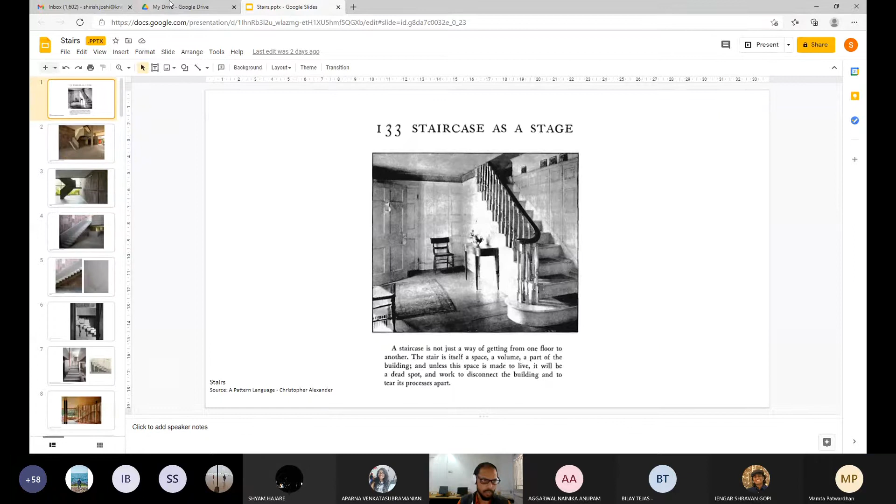Oops, sorry, just a second. I'll share this. Can you see this? Can you see the screen? Yes. Yes. Okay, great. Let me go to a full screen view and present.

This was the presentation that we had done last time, where we had looked at the staircase, and we began with this particular staircase, built in RCC at the Mill Owners. I think many of you have been to the Mill Owners and have seen this staircase. So I have a question to ask you. Can this staircase be built in steel? If you were to build the staircase in steel, what are some of the main considerations that you will immediately bring into play? Would anybody like to reflect a little bit? The basic form of the staircase has to be the same, and the basic principles also have to be the same. Can it be done?

I'd probably take it as a folded plate if you want the exact same form. The beam that meets the column may not be necessary, because it's already being supported by its own kind of form. The folded plate adds stability, and then you have it connecting directly to the upper slab. Okay, so Shravan will take just a single plate and fold it, literally like when you are making a model. You take a piece of board and fold it, but you cut it in the middle and bend it to create the two flights also. Is that what you're saying, Shravan? Yeah, and probably add a stringer or two for stability and for the aesthetic.

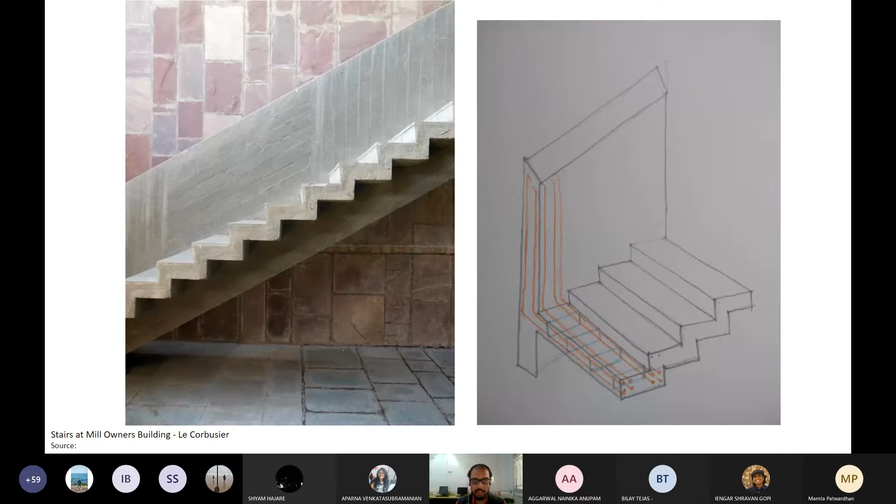Now, this is in many ways that folded plate, Shravan, that you're talking about. Yeah, the only difference is that it is made not with just a single folded plate of steel, but it is a composition of steel and cement where required, on whichever part of the staircase it is required. Each component is compensating for the other to create this kind of a staircase.

So it's possible to imagine that this staircase can also be constructed entirely out of steel. I'm going to quickly flip some of these and come to, for example, this staircase, which is also a steel staircase. If you can see, there are three stringers going at the bottom that meet the landing, and from the landing there are three stringers going up again, and an entire elaborate kind of a step is introduced.

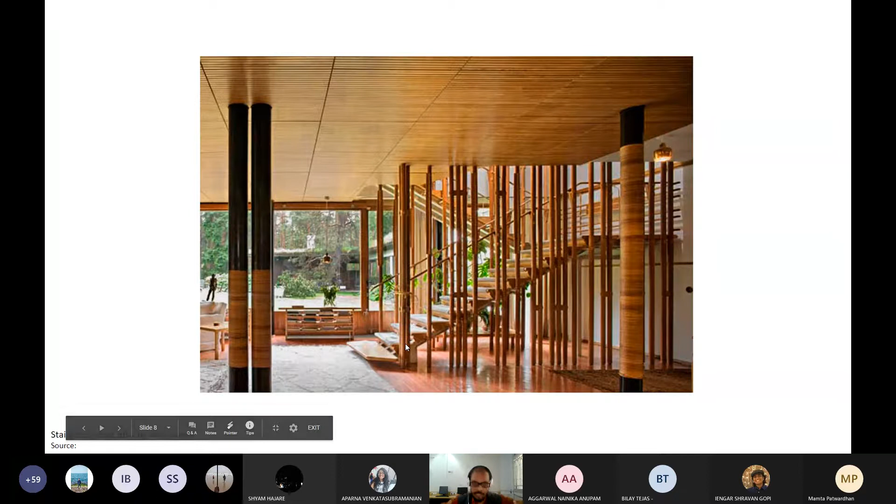I don't know if I have the detail of this somewhere. You can see over here on the side that the entire wooden base is anchored onto these three stringers, and furthermore the wooden base also supports the carpeting or the upper layer created for the staircase. You can also see that the sides and the railings are entirely made out of steel. The railing is not supported on the staircase itself, but directly on the side framework going up.

This is done for several reasons, including an aesthetic and visual sense that he wants to create. If you look at the side elements, they are not all put in the same sequence. They are actually quite random. In one case, when you climb up, on the other side they are in fact not there on the upper side at all. It doesn't need it.

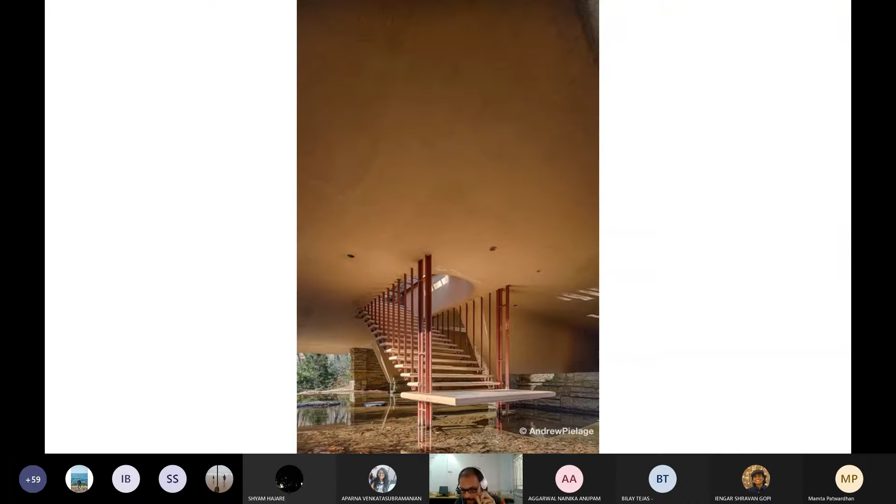Please also take a look at the material, the sizes of the steel members and the way in which it is hung. Where does the steel member become thick? Where does the steel member become thin?

Another steel staircase, in a house by Frank Lloyd Wright. The main structural member sizes are now really slender, but not as thin as a cable yet. They're steel rods suspending from the top to where the step is hanging. These rods are taking the support of both these flights up to this point. There's no need for a railing over here because the steel rods themselves behave as a protective barrier.

I'm going to quickly skip... Sorry, I just had one doubt about that staircase you just showed us. Go ahead. So when the cables are holding up the stairs, I can see that some of them are also driven into the wall, especially the ones seeing a higher force from gravity because they're above. So is the cable in this case only holding up the cantilever end while the other end is driven into the wall, or is the cable taking the entire load?

Shravan, in both these staircases, the other end is actually anchored onto the wall. So the cables are taking less weight than it looks like. The cables are taking half the load, literally. If you're spanning say 1 meter, 50 centimeters of the load on one side is taken by the cable, and the rest of it is taken by the wall.

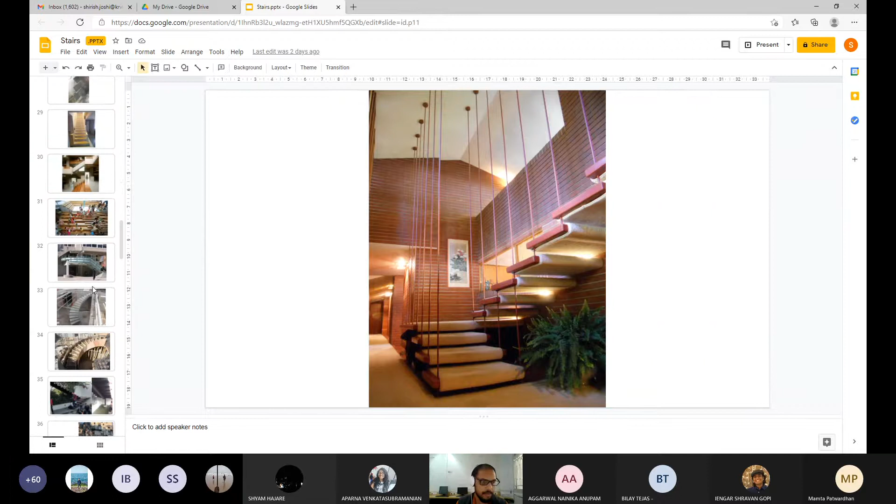Let's look at this. Here's a very interesting staircase. A part of it is built with concrete and masonry, and a part of it is extended outwards from an existing structure, and becomes a landing porch as well as a staircase. This entire staircase is actually supported directly from this particular element. You can see that the entire step is anchored onto that.

This stringer, which is on the outside over here, is also anchored onto these members, and that is how this stringer gets supported at this point to this beam. A part of the stringer gets anchored onto the platform over here. A smaller steel staircase of this scale generally does not require too much foundation. It does not require heavy foundations. There are ways in which you can anchor the staircase safely into a wall or into a base.

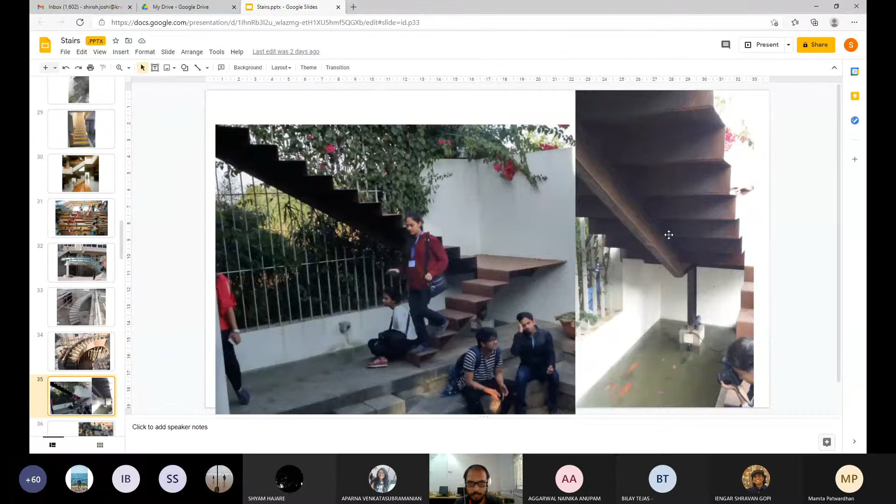If you remember, Shravan, we had seen another folded plate staircase, where earlier it was just a folded plate, but there was some motion and movement, and then the architect has added a stringer in the middle of the staircase. Same logic: a simple folded plate with a stringer attached to it, and that serves as a staircase.

Here's another advantage or potential of steel staircases: because they are very light and exert much less load onto the slabs, you can very quickly connect levels without having to compromise on your design. If the same staircase was built in RCC, I would have to create a structural system below to carry the load of that staircase. The dead load of the staircase itself would be so heavy.

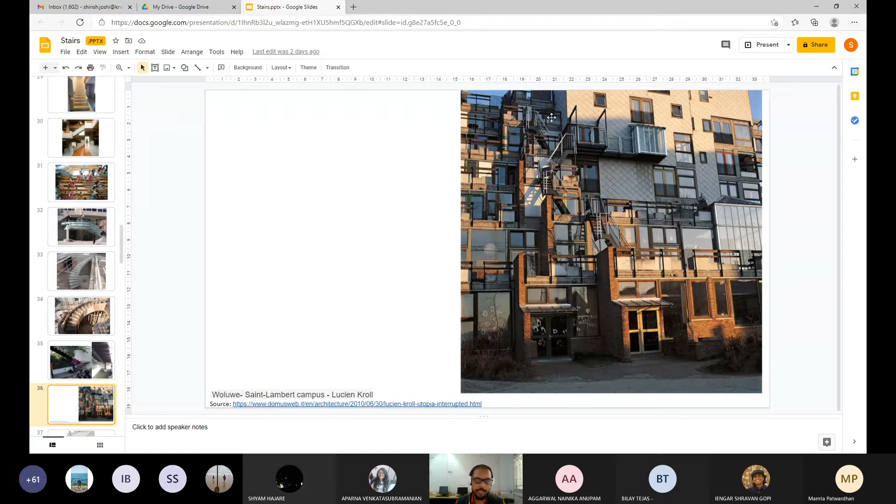In most steel staircases, that is the biggest advantage, that the dead load of the staircase is very light. So you are able to very quickly manage your movements in places that otherwise would be difficult in the logic of a masonry or concrete staircase.

I had shown this staircase as a utilitarian staircase that allows you to climb up. You can see that there is no foundation to this staircase. The slab itself is acting as a foundation. There is a disc or plate created at the bottom, which gets anchored into the slab, and the entire staircase is literally standing. It's like a heavier version of your ladder, you can say.

Although the comfort of the staircase is the same. By comfort, I mean the tread and the riser ratios are the same as would be in any other staircase. Yeah, the railing and everything is then lifted off.

The stringer beam in this case is compensated by actually breaking the single stringer into two parts and running them on the sides. So you are also hollowing out the material of the stringer, and you're using much lighter materials, but you're relying on the structural stability which is created by this element itself. So the whole thing behaves as a stringer, with this particular kind of a tread also acting as a tie in holding the stringer.

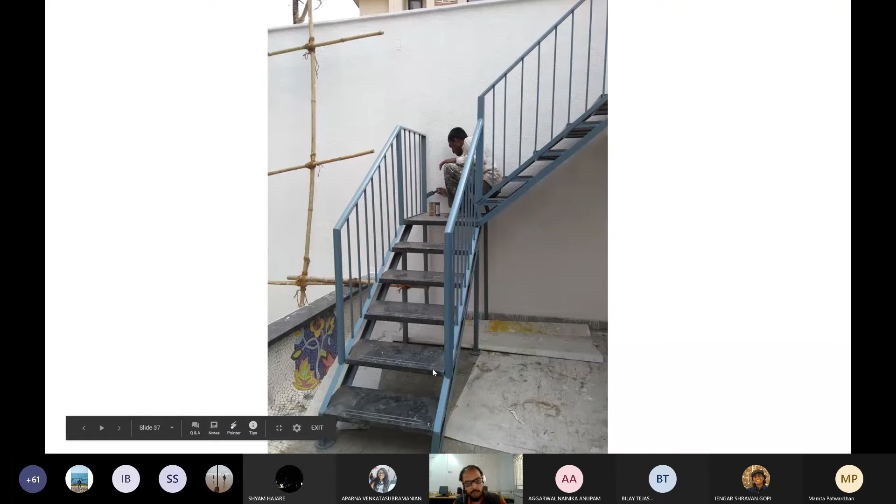The stone, the granite on the top, is two part. There is an upper slab, and then there is a front which is attached to the upper slab. So it appears thick, but in fact it is not thick. In fact, if you see carefully over here, sorry, how do I go to view, present? Yeah, if you see here, the actual thickness of the granite is only so much. It is maybe 3/4 of an inch, something like that. But in the front, we've added one more strip to make it appear like it's a thick stone.

Okay, not important, not important.

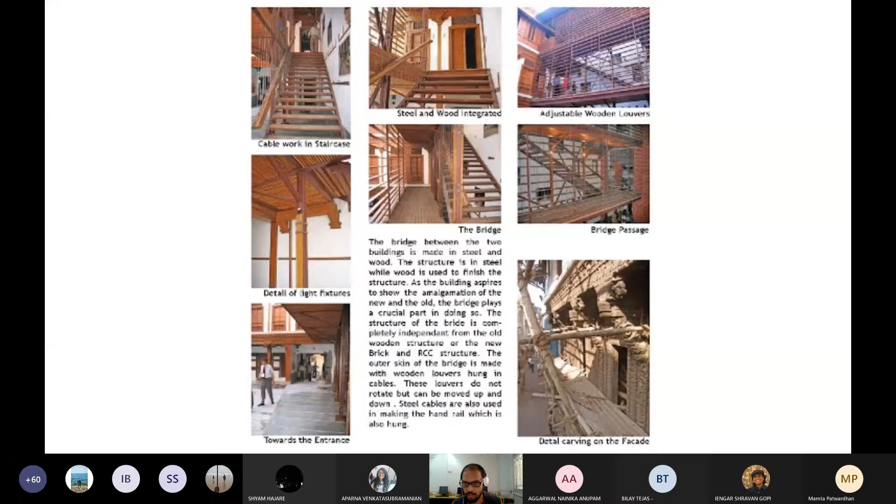So here in this particular case, there were two heritage structures, and we were making a connector kind of a bridge between these two structures, and we decided to create that bridge with a steel and timber combination. Okay, I'm going to quickly go ahead now to the part that we are going to focus on. This logic remains the same. Whether you're doing a steel staircase or any other kind of a staircase, all this remains the same.

Okay. Now, am I clear? Am I making sense? Somebody has to say yes. Suresh. Okay, yes, okay, fine, Mamta.

Okay, so now a little bit of a history of steel staircases. You will find that a large part of steel staircases come in the category of utilitarian staircases. I call them utilitarian because they are not the main functional staircases inside the building, but they are created more as attachments, mainly for services, mainly for fire, in this case for fire escapes.

Across America and Europe and even places in South America, laws have been put in place to create secondary or tertiary staircase systems in order to create safe evacuation in case of fire. And steel staircases have played a phenomenal role in bringing that aspect to the entire building construction industry, coming from their advantage that they are extremely light and that they don't require heavy foundations.

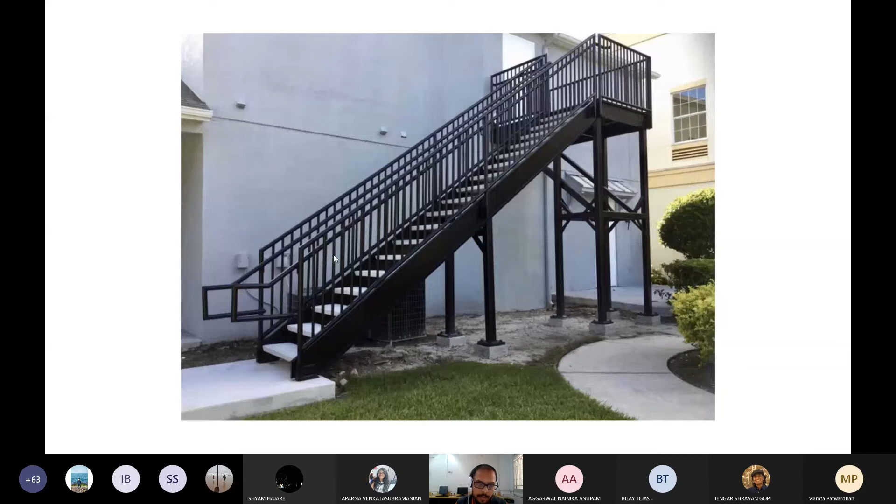The rest of it, if you see, is simply welded. You can see that the railing is welded from your stringer, comes out, and the entire railing gets welded. Okay, another one. But see the change from the earlier one. The material is getting lighter.

This is a simple plate which is folded inwards, if you can see over here, and that inward fold itself is behaving as an anchor to the base. And there is nothing else that is required. It just gets connected to the top with a bracket that brings the load back onto the wall. Very light staircase, getting lighter in fact.

And I'm showing you two other staircases which are very similar but yet distinctly different. This one is made with a box section. I think someone was mentioning last time, galvanized steel box section. That simply folds, gets one kind of a member necessary, which is over here, and then anchors back straight into the wall, if you can see. And the entire railing is also constructed with a thinner GI box section, including the straight members. Again, box sections that get welded.

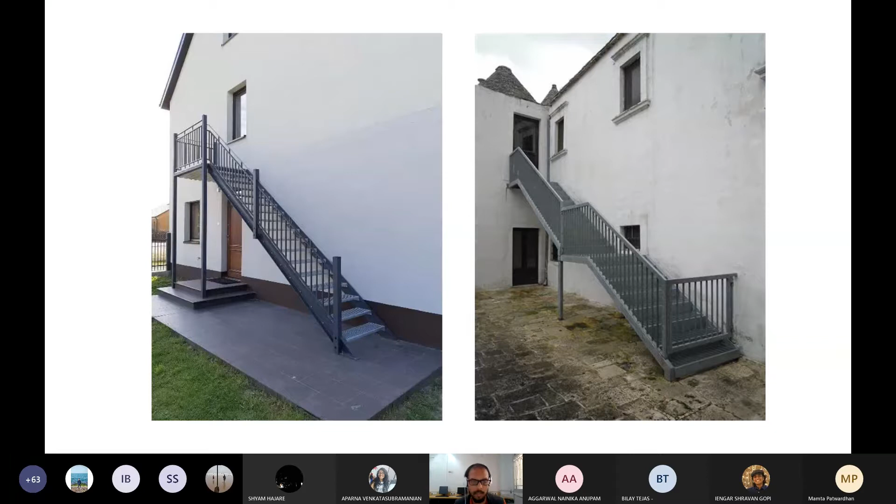Of course, both these staircases have treads which are made with corrugated steel plates. So underneath you will have some kind of a structure which is welded or bolted on the sides, and you have a steel corrugated top. Okay.

Now I'm going to put some videos for us to watch, and I'm trying to figure out how to do that. Another very interesting staircase. Please look at what happens at the base. The base does not require heavy foundation because the staircase is fairly light.

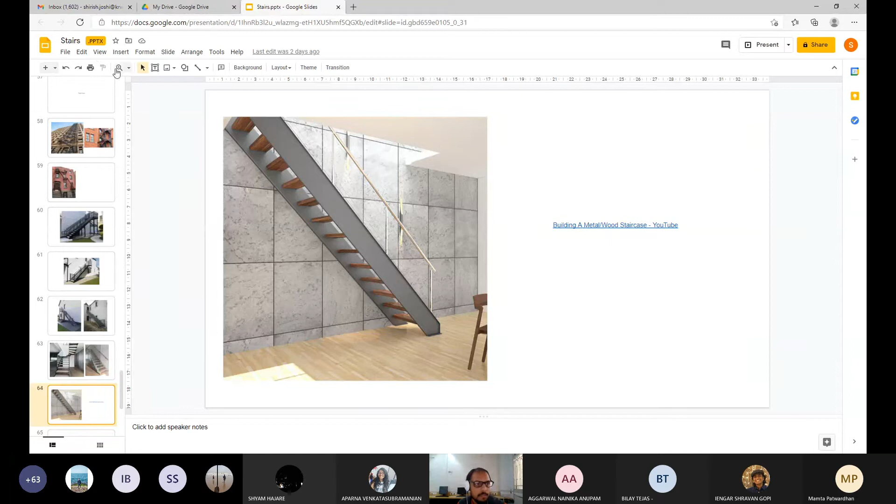We are going to see some videos now, so just bear with me till I get the link onto the... Okay, Mamta, I'll have to share this again, na? Just wait. Share and put on the sound if there is sound. Let me first share the... Include desktop audio there. We'll take questions. Just wait for some time. I'm sharing this link for those who cannot watch. You guys can watch it directly. And now I'll reshare this.

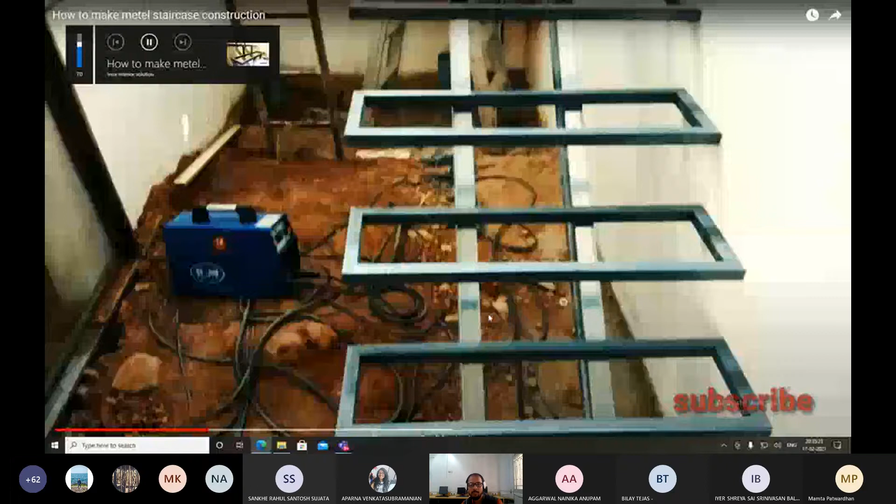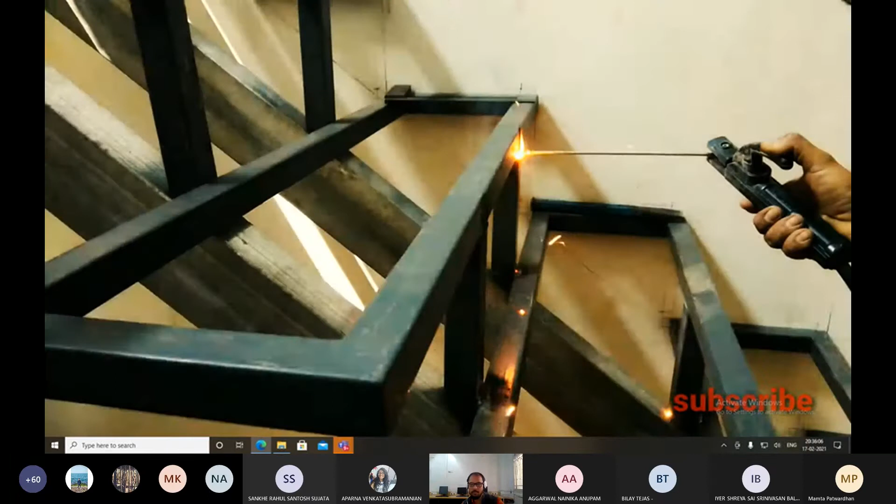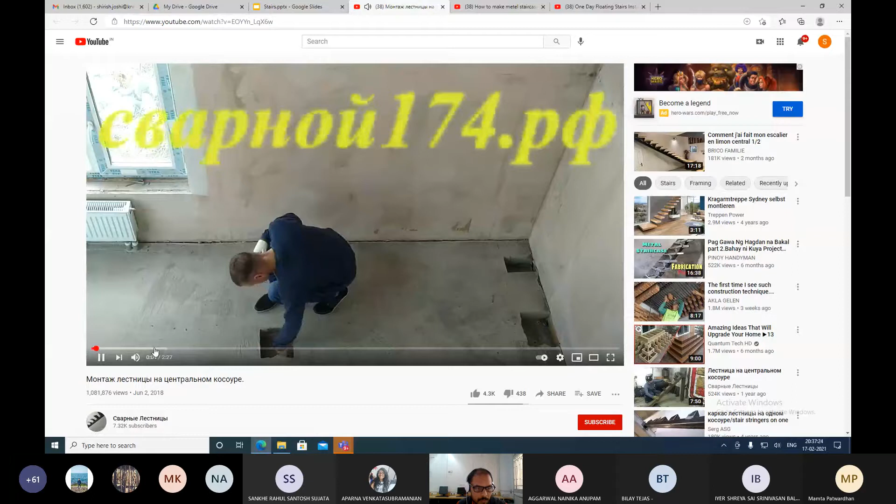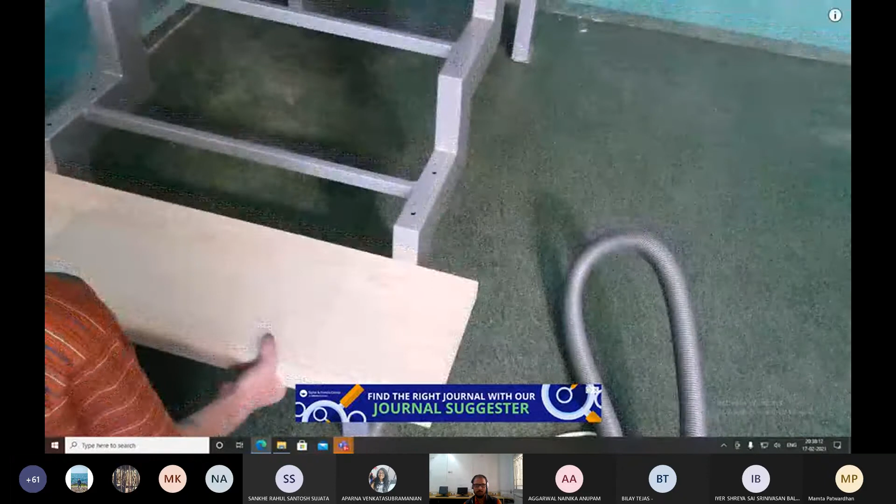Are you saying something, Shirish? I can't hear you. Shirish, can you reshare with the sound option? I think he's on mute. That's why we can't hear the sound.

Okay, let's see. Wait a second. Now can you hear me? Can you guys hear me? We can hear you. Okay, now let me play the video. Of course, it's in Russian, or whichever language it is, it doesn't matter. We just have to see.

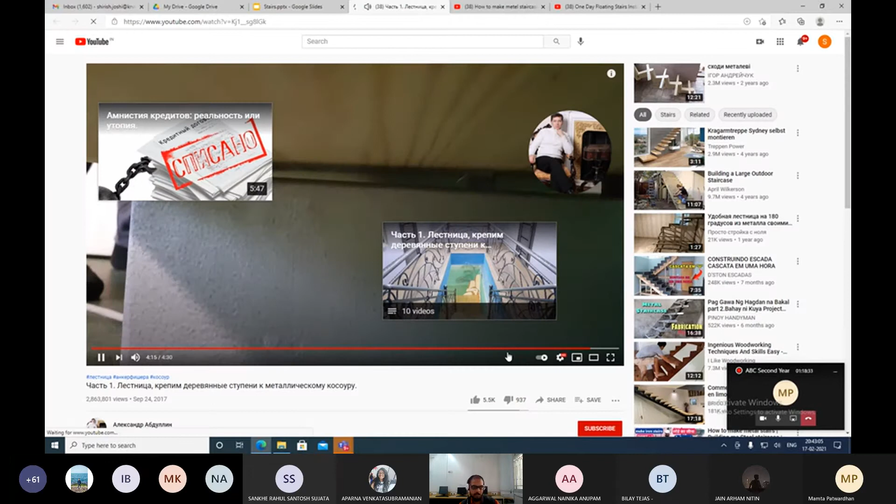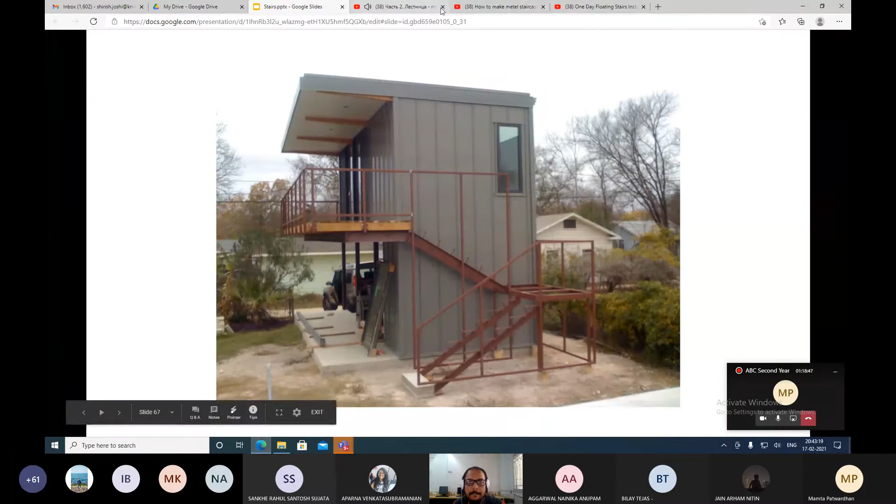Okay, I'm stopping. Thing is still on. Yeah, I think I'm almost done.

This is an interesting example I found of an external staircase that is winding and coming back and becoming part of the extended little gallery. Again, built with very light materials. The foundations are very, very basic. And of course, I put in the end, there's the Scarpa.

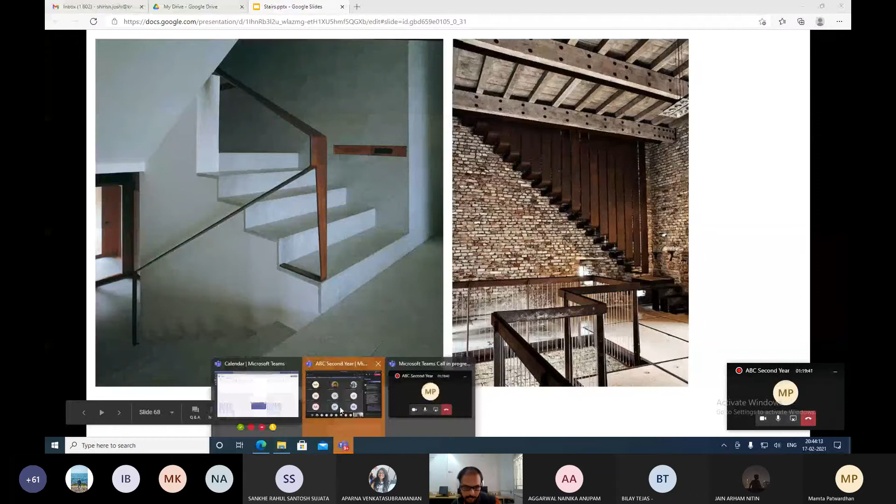Sometimes the metal gets expressed in different ways. Here he uses it in the railing, again folded plate, but he constructs the railing out of it. He cuts it and folds it and allows the railing to be expressed in a different way. Just hold on a second. I'll keep it at this slide and let's take the questions.

Sorry, Nainika, which part did you not hear? Oh, no, I couldn't hear the video, but then it was shared, so I could. Okay, thank you.

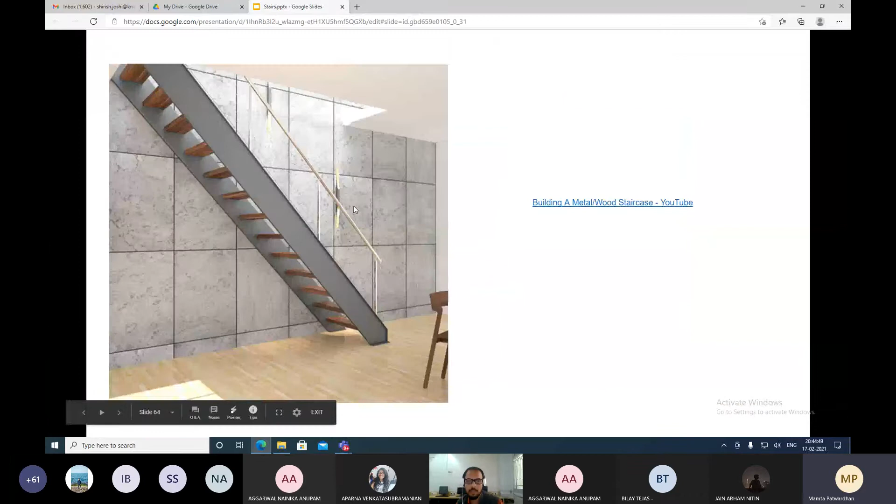Shirish, there's those couple of examples from last time. Did I miss it while doing something? Tell me which ones. You had only put it together, I think. I'll just go back. It's there in the PPT. This one. I'll put it up on chat.

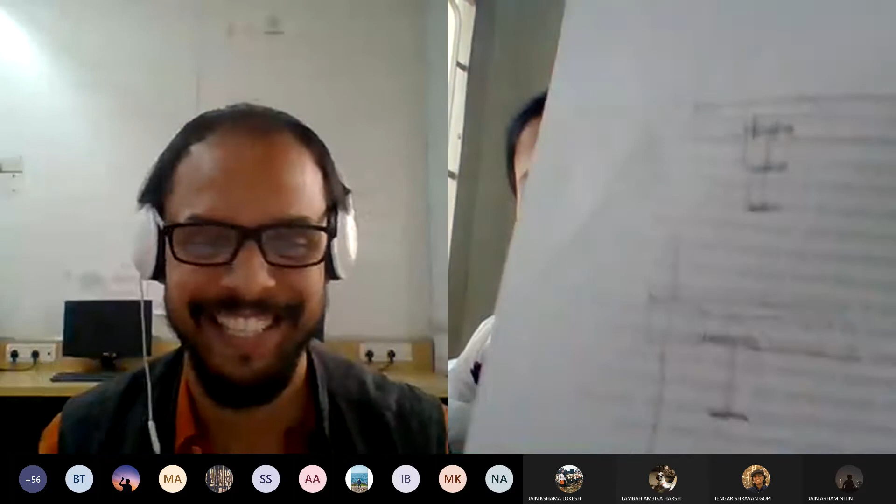You can do it any which way. Basically, what I'm trying to say is,

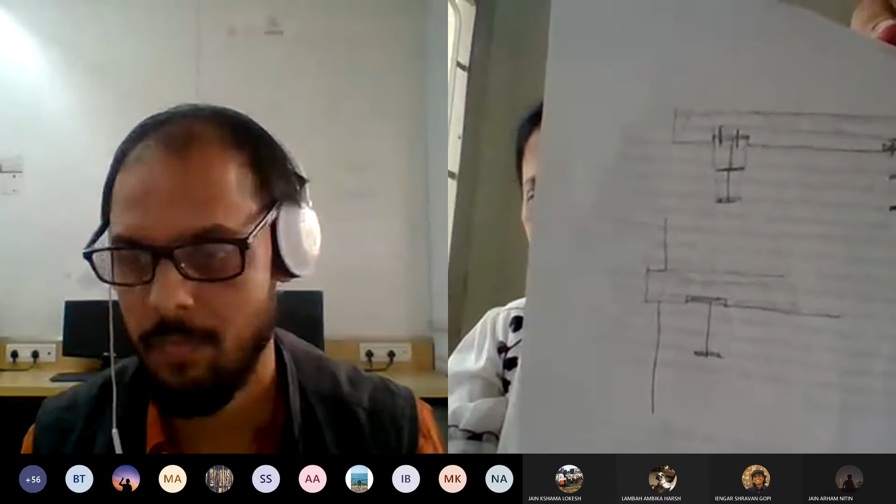You can do it. It's achievable in steel. There are no rules as such about it, right? Yeah. Generally what happens is that we are so accustomed to looking at RCC staircases, and in steel the staircase can go really light. Remember that. So don't be afraid to use steel and smaller steel members and see whether you can achieve structural stability with that.

In general steel, I think span-to-depth ratios go up to 1:20. So your stringer can actually be designed for a 1:10 to 1:20 kind of depth also. Okay. Mamta, you've put a cast iron steel detail over an image, right?